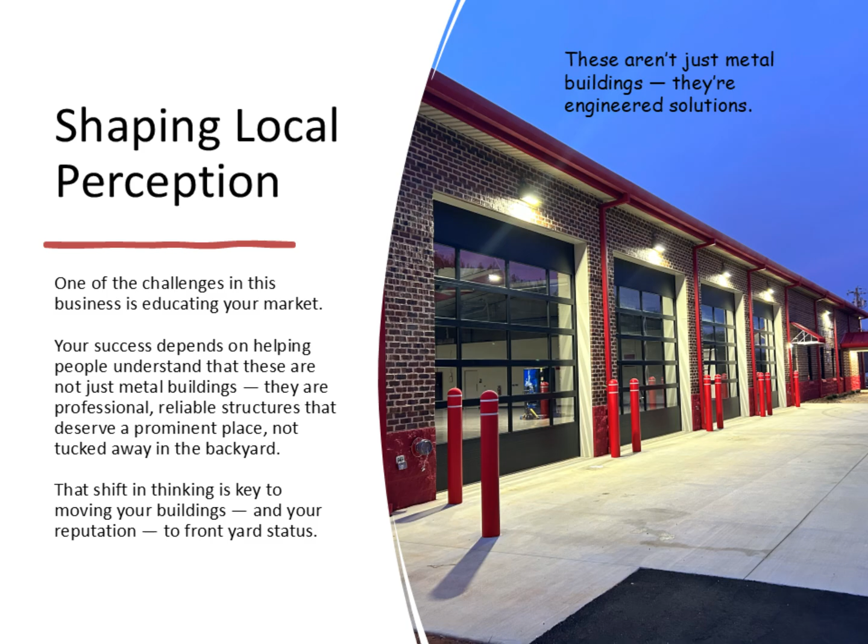A big part of your job is educating the market. People need to understand, these aren't just metal buildings. They're engineered solutions. They're reliable, cost-effective, and look great, too. When you change that perception, you move your projects from the backyard to front yard status.

There's a common belief out there that industrial or commercial buildings must have huge concrete walls to hold up the roof or to keep out the heat and cold. But that's just not true anymore. With CBC's engineered framing and panel systems, we can meet those needs and do it with style, speed, and cost savings.

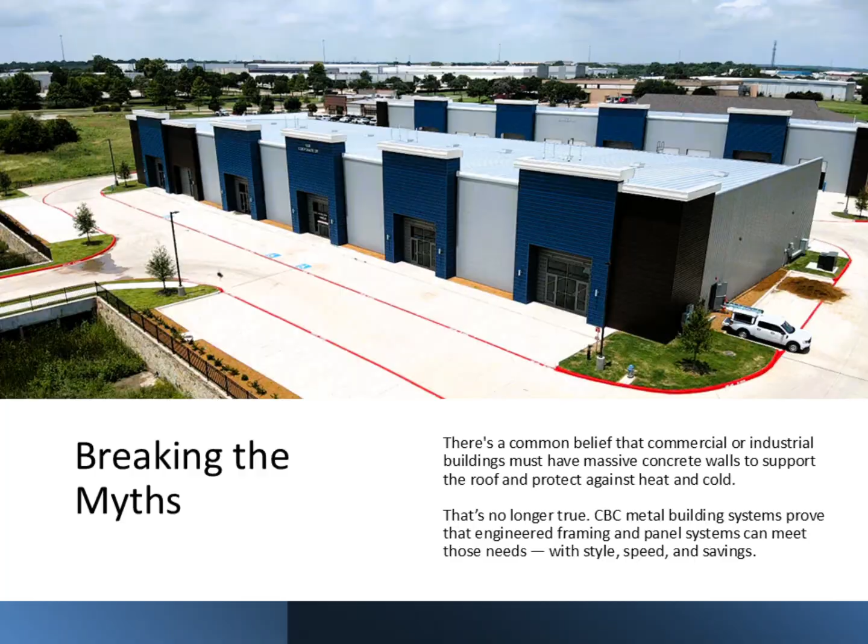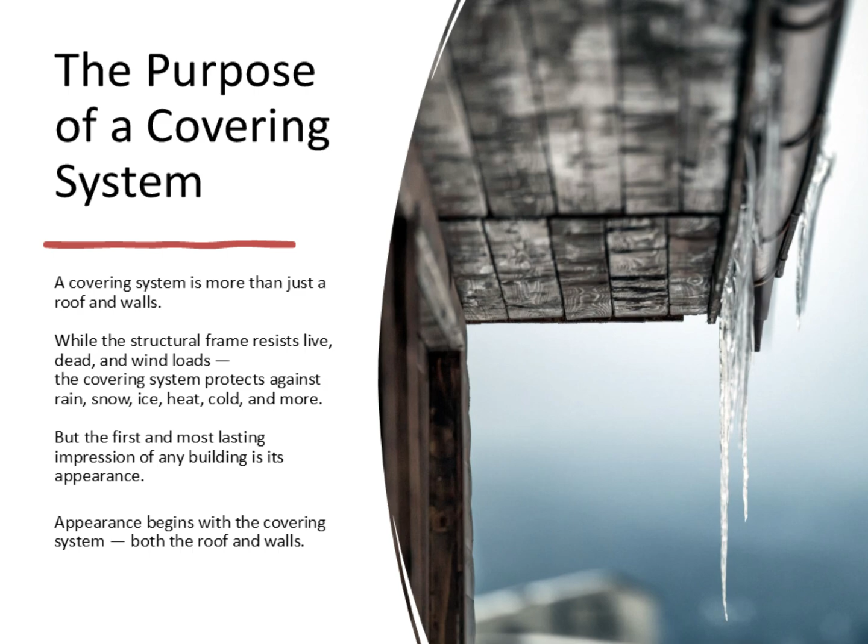A covering system is more than just a roof and walls. While the structural frame resists live loads, dead loads, and wind loads, the covering system protects the building and its contents from rain, snow, heat, ice, and cold. But here's the thing: the first and most lasting impression of a building usually comes from how it looks. And that means the covering system matters a lot, both functionally and visually.

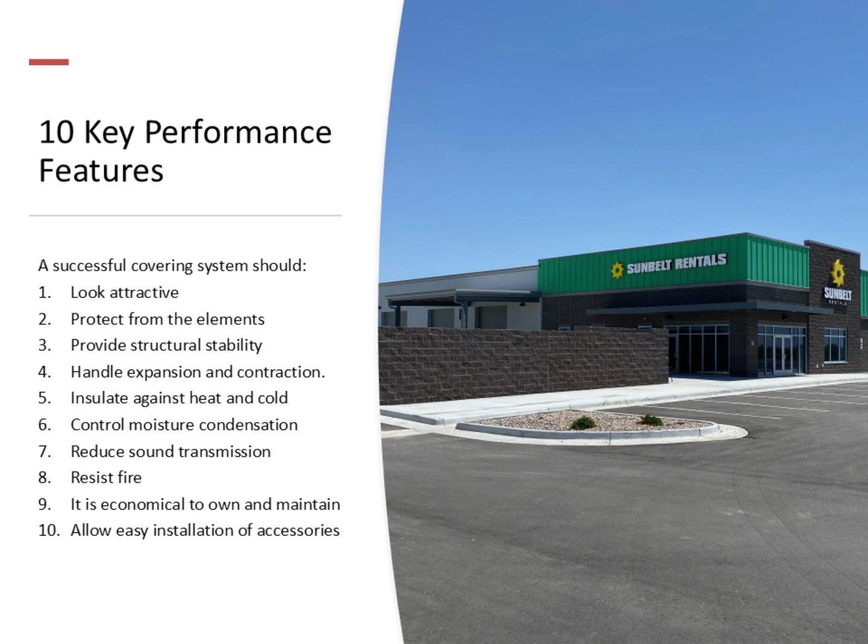Let's break down what makes a covering system truly perform. A great system should be attractive in appearance, protect from the elements, provide structural stability, handle expansion and contraction, insulate against heat and cold, control moisture and condensation, reduce sound transmission, resist fire, be economical to own and maintain, and allow for easy installation of accessories. Each of these can benefit the building owner in different ways.

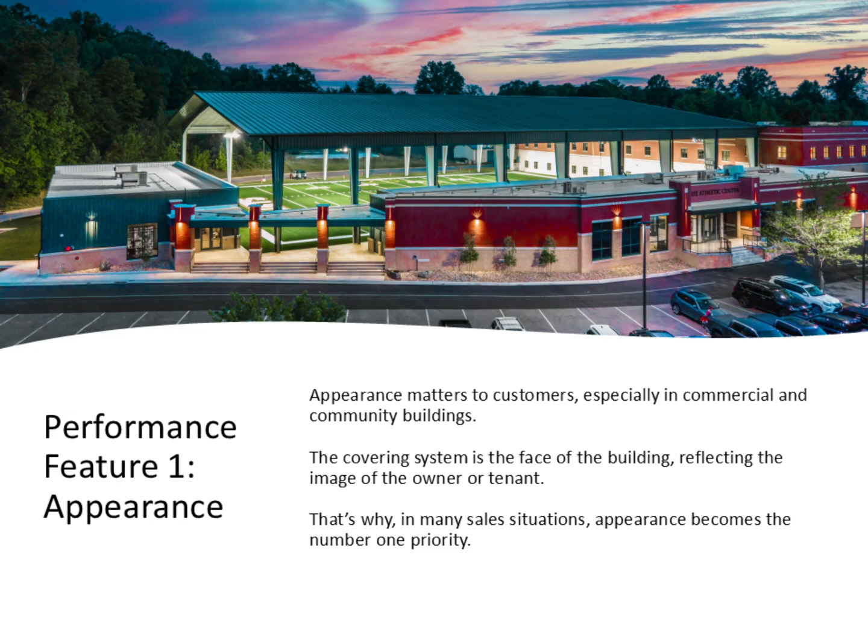Let's start with appearance. Most customers place high value on how their building looks, especially in commercial or community spaces. The covering system, whether wall or roof, is the face of the building. It's the first thing people see, and it reflects the image of whoever owns or occupies the space. That's why, in many selling situations, appearance is the customer's top concern.

Water is one of the most common causes of maintenance problems in buildings. It can come as snow, ice, or wind-driven rain, and it only takes a tiny opening to cause big issues. That's why the panels, fasteners, sealants, and flashing must all work together as one system to prevent leaks, avoid rot and corrosion, and protect the building from the inside out.

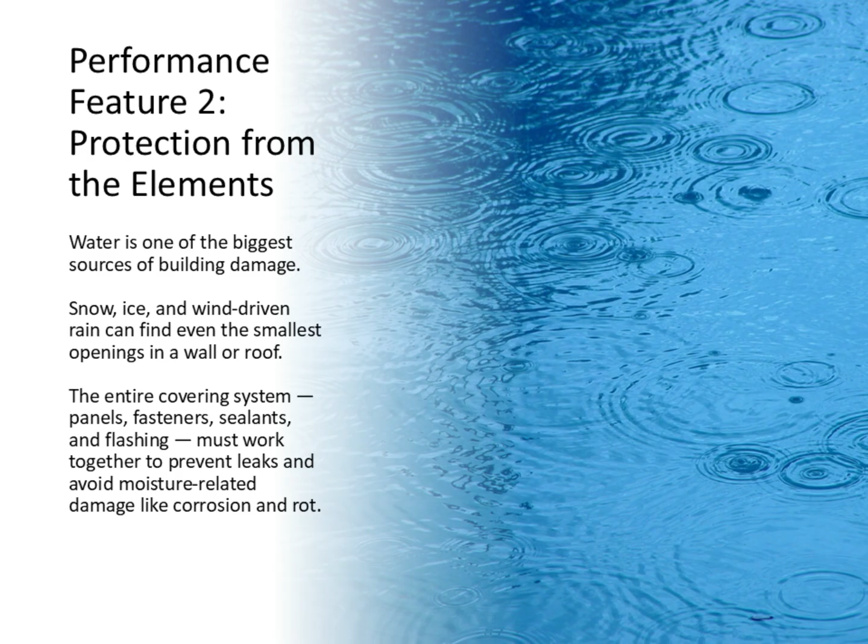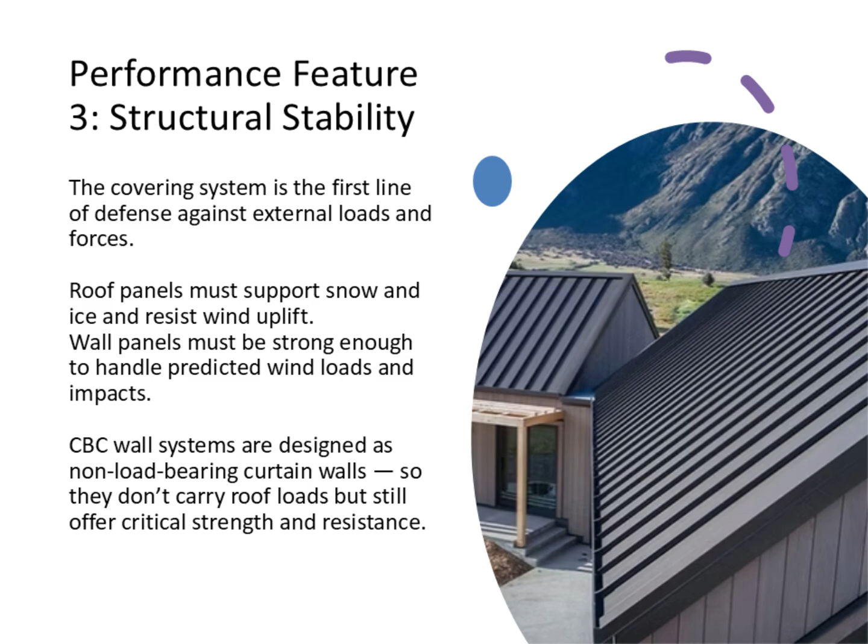The covering system is also the first line of defense against outside forces. Roof panels must be strong enough to support their own weight, plus live loads like snow and ice. They also need to resist wind uplift. Wall panels, while not load-bearing, still need to stand up to wind pressure and daily abuse. CBC wall systems are designed as curtain walls, which means they don't support the roof, but they're still critical for structural strength.

Temperature changes can have a big impact on metal panels. In many areas, surfaces can swing from 10 degrees below zero to over 140 degrees above. A good covering system is designed to handle that kind of movement, with joints and panel shapes that absorb the stress, without bending, breaking, or distorting.

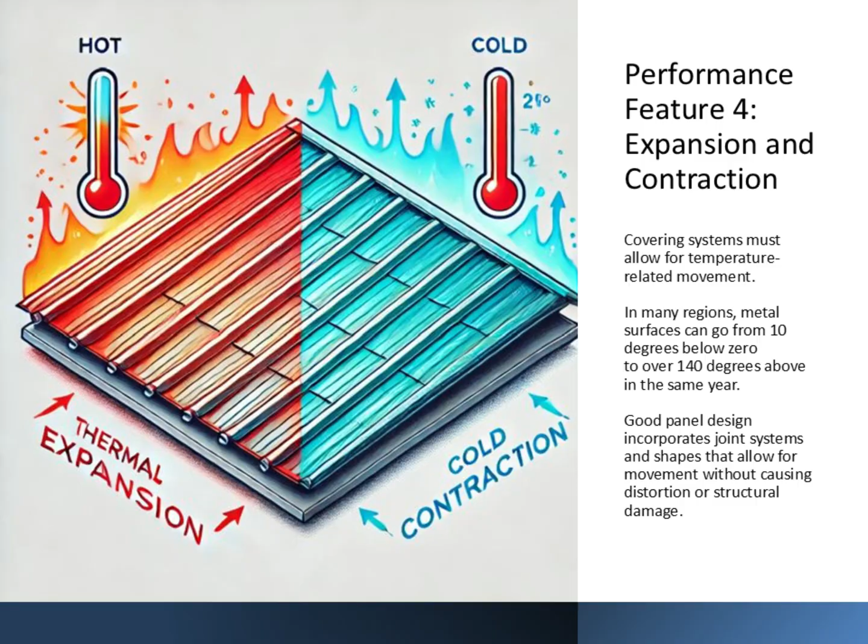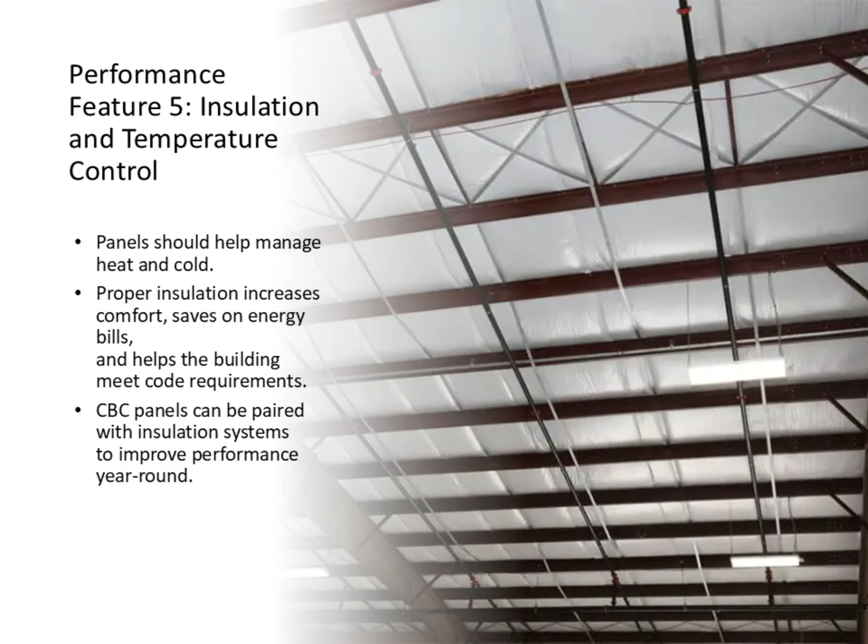Insulation plays a big role in comfort, efficiency, and building performance. Good insulation helps control indoor temperature, reduce heating and cooling costs, and improve overall energy performance. CBC panels are designed to work with modern insulation systems so the building stays comfortable and code compliant all year long.

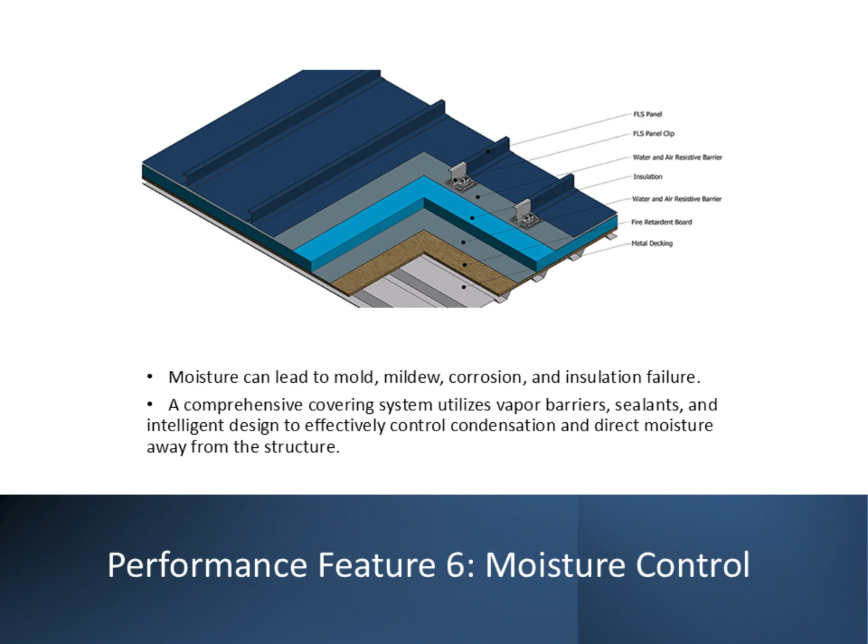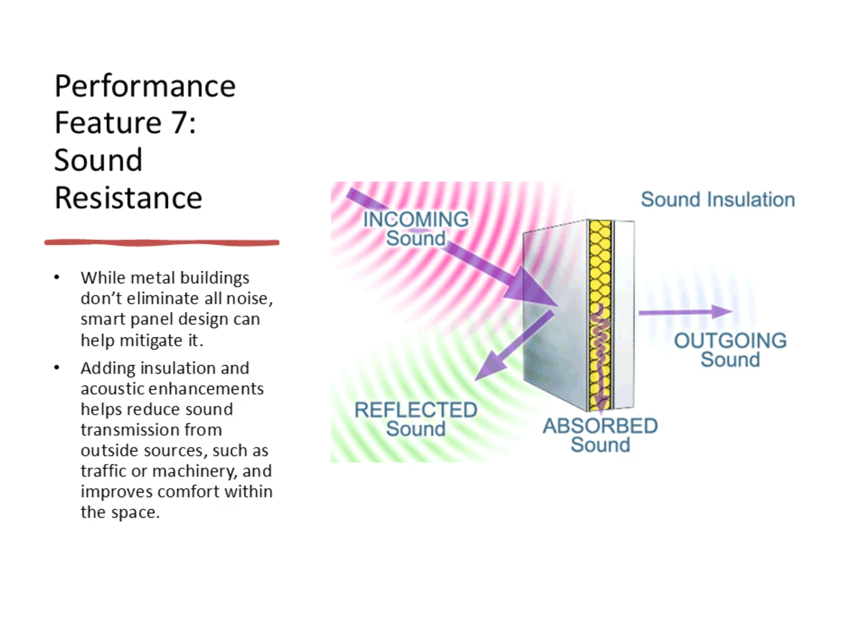Moisture is a hidden threat in any building. If not controlled, it can lead to mold, mildew, rust, and ruined insulation. That's why a good covering system uses vapor barriers, quality sealants, and proper design to reduce condensation and move moisture away from the structure. Metal panels alone don't block sound, but when combined with the right insulation and acoustic design, they can help reduce noise from outside. That means less distraction from traffic, machinery, or weather, and a more comfortable interior space.

Fire safety is a serious concern for any structure. Metal panels are naturally fire-resistant. They don't burn, and they don't contribute to flame spread. When paired with fire-rated insulation and sealed properly around openings, CBC systems help meet strict fire codes and improve overall safety.

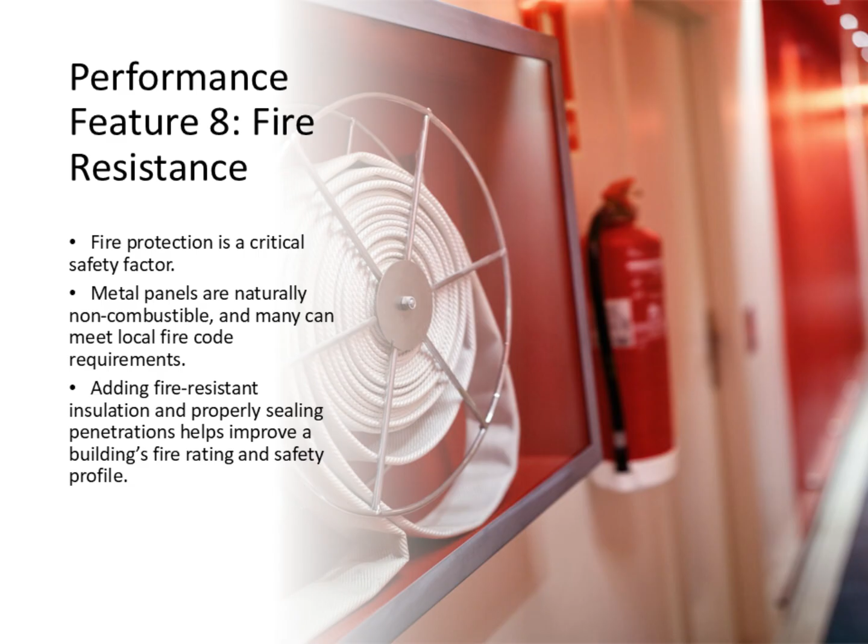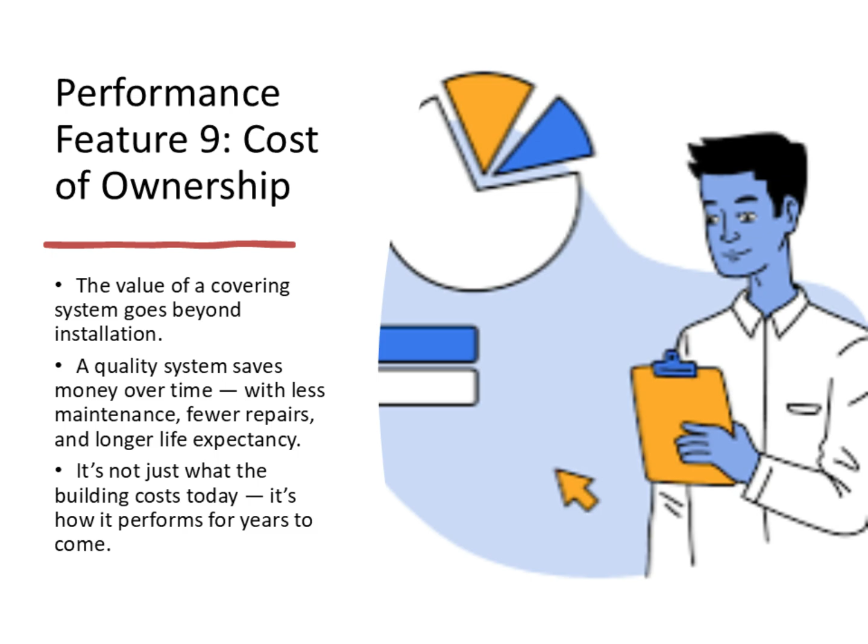Some covering systems look inexpensive up front, but cost more over time. A CBC system is built to last. That means fewer repairs, less maintenance, and more value over the life of the building. It's not just about the purchase price, it's about what you save in the long run.

Accessories like doors, windows, and vents shouldn't be a hassle. A good covering system makes installation quick and clean. And if the layout needs to change down the road, you want flexibility to adjust without cutting into profits or performance.

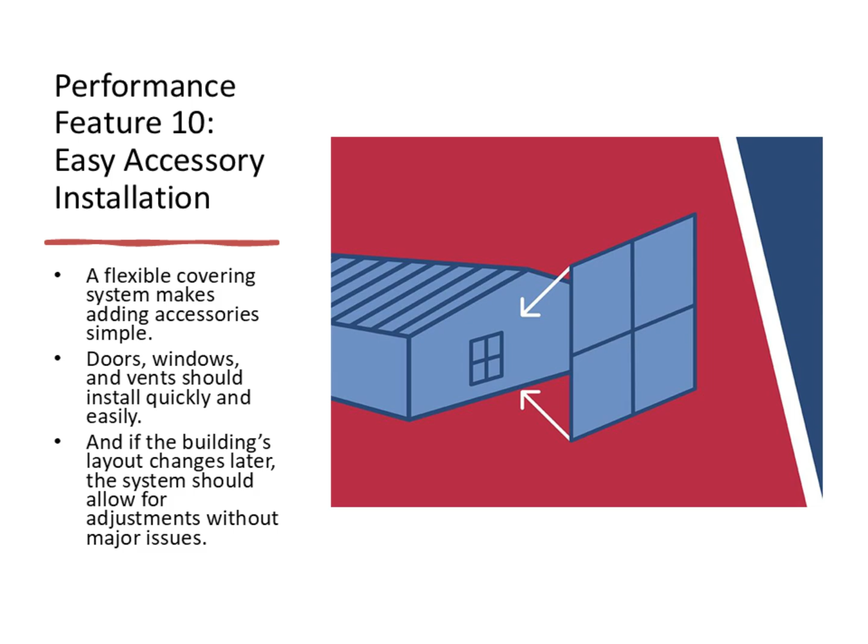CBC panels are built for strength and versatility. Most roof and wall panels are formed from 26 or 24 gauge steel. Standing seam panels are 24 gauge as a minimum. Panel finishes include Galvalume Plus, Signature 200, and Signature 300, giving your customers both durability and design flexibility.

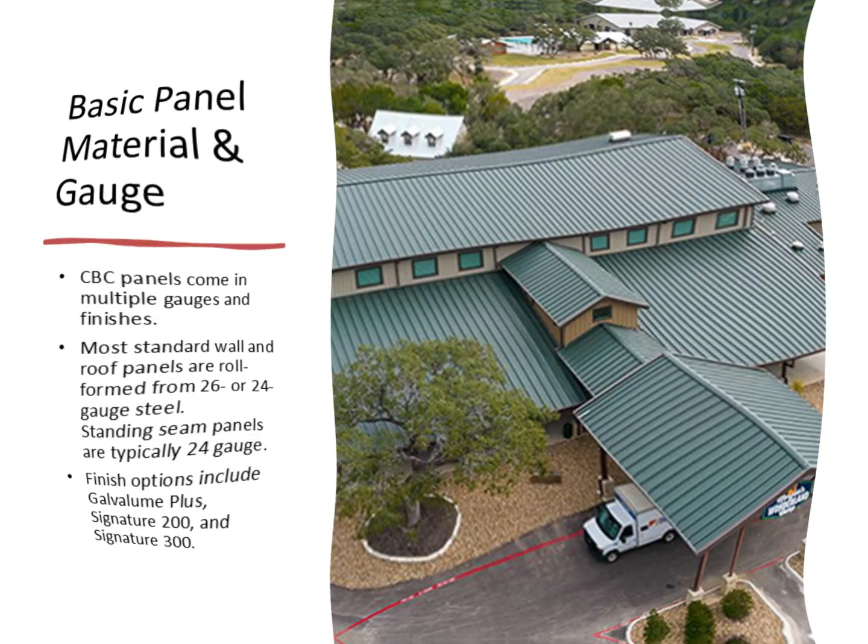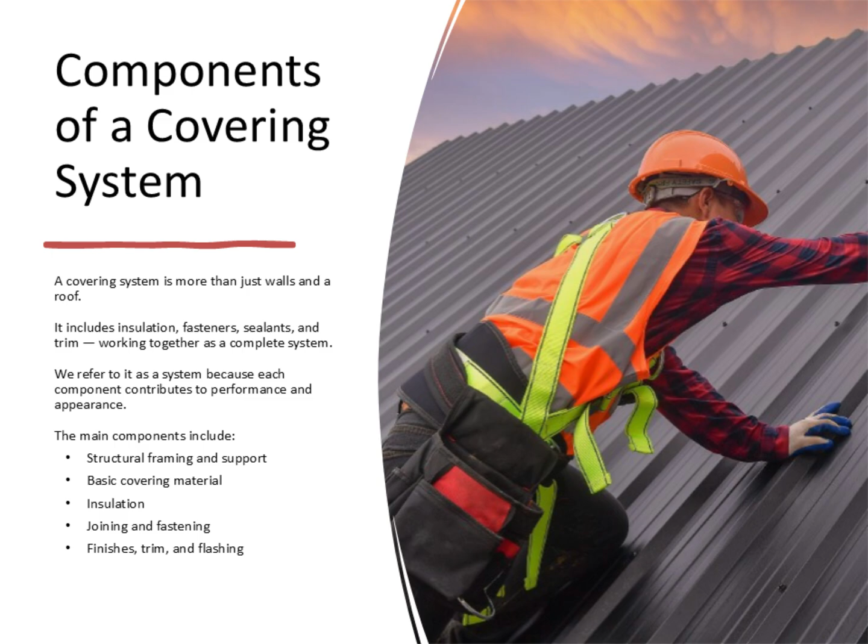Let's take a closer look at the parts that make up a complete covering system. It's easy to think of just the roof or the wall, but those are only part of the picture. Most systems also include insulation, fasteners, sealants, and trim. That's why we refer to it as a system, because all these parts work together. The 5 main components are structural framing and support, basic covering material, insulation, joining and fastening, and finishes, trim and flashing. Let's take a look at each one.

A covering system gets its strength from 2 places: the structural frame and the covering material itself. CBC roofs are supported by purlins and eave struts. Walls may hang from the frame, rest on the foundation, or do both, connecting to base angles, girts, and rake angles. Panel strength also comes from configuration, the profile or shape of the panel. CBC's most common panels include the PBR, PBU, AVP, RR, and RU styles.

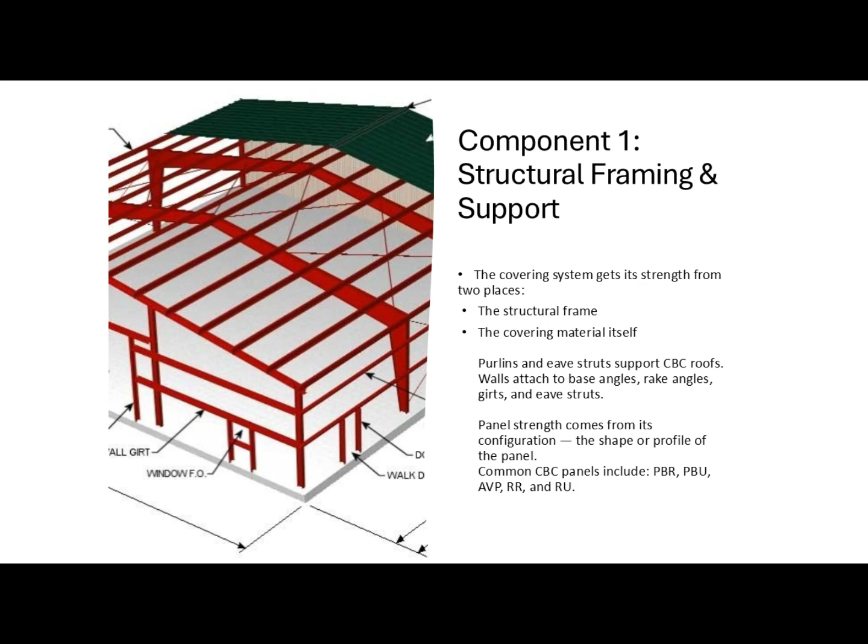CBC panels begin as high-quality steel coil stock, which goes through a detailed cleaning and coating process. Signature 200 and Signature 300 finishes are roller-applied, baked, and bonded, giving great durability and long-lasting appearance. A 30-year finish warranty covers issues like fading, chalking, or peeling. Translucent panels are also available. They can reduce the need for artificial lighting and add architectural appeal to the building.

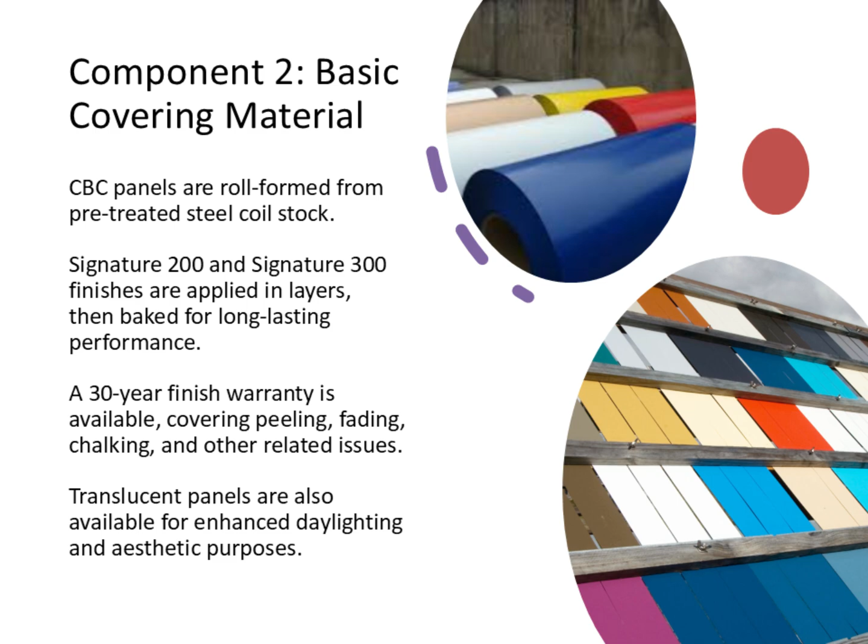Insulation helps control the flow of heat. Good insulators are light and fluffy, like fiberglass or foam, and work by trapping still air. CBC insulation comes in 3-inch, 4-inch, or 6-inch thicknesses with a white vinyl backing. CBC also offers translucent wall panels that act like skylights, called sky belts, which let in natural light and lower lighting costs.

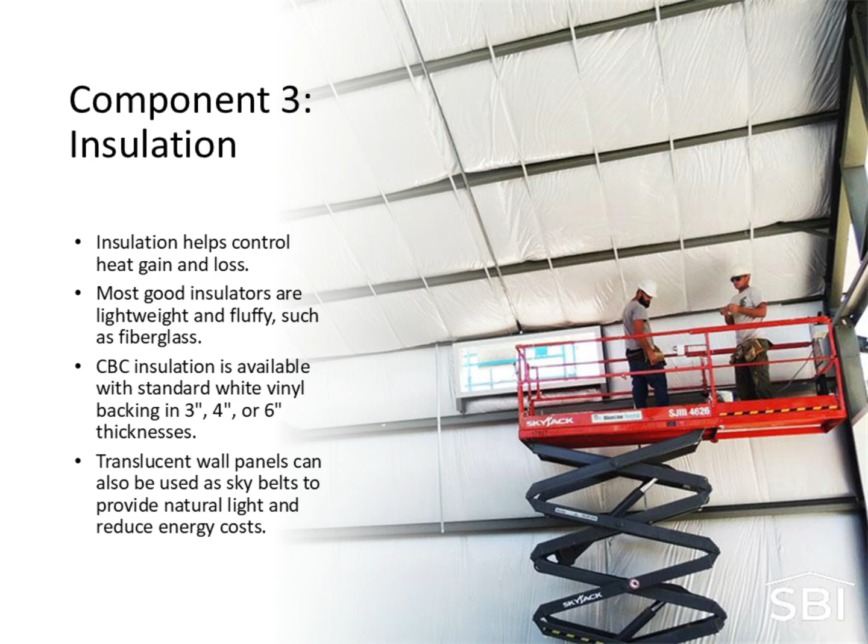All parts of the covering system need to be joined and fastened properly. That means using side and end laps, sealed with tape, foam, or mastic sealants. CBC uses self-drilling screws for most applications and electric seamers to secure standing seam roofs. The fewer joints there are, the fewer chances for leaks or failure.

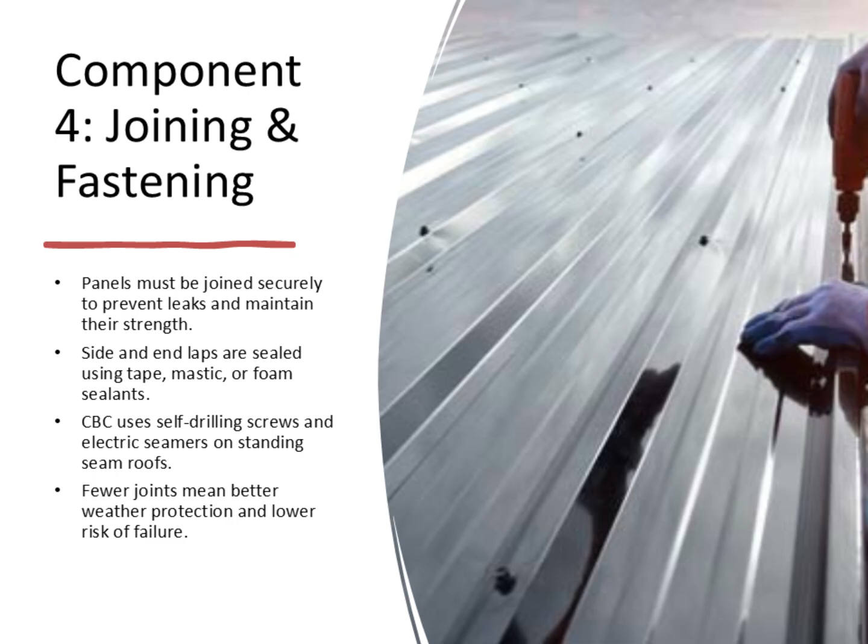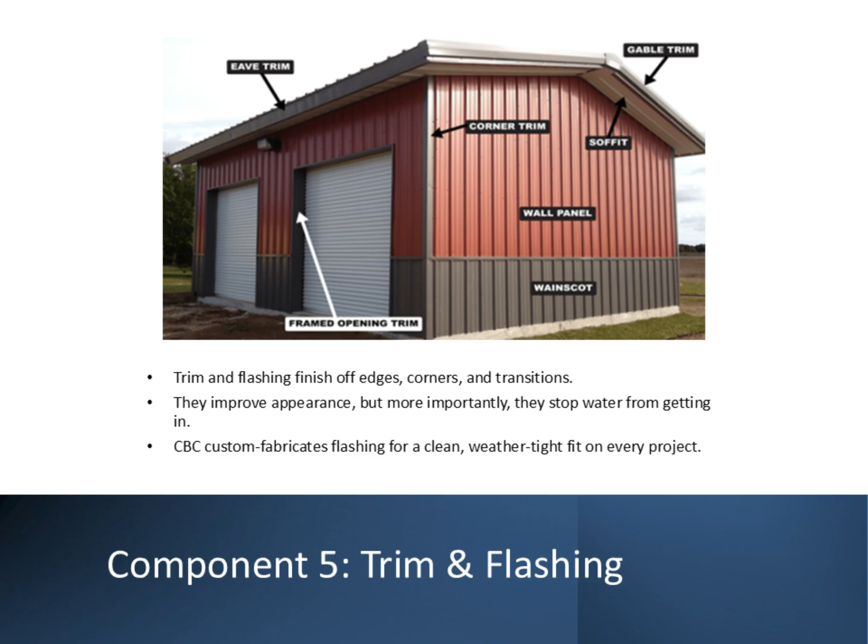Trim and flashing finish the job. They seal corners, roof-to-wall transitions, and panel ends, keeping water out and improving the overall look. CBC custom fabricates trim and flashing for a clean, tight, and professional appearance.

In this module, we covered a lot of ground. We talked about what a covering system is and why it's critical to both performance and appearance. We went through 10 key features that impact quality and the 5 main components that make it all work together. With this understanding, you're better prepared to help customers make informed choices about their metal building solutions.

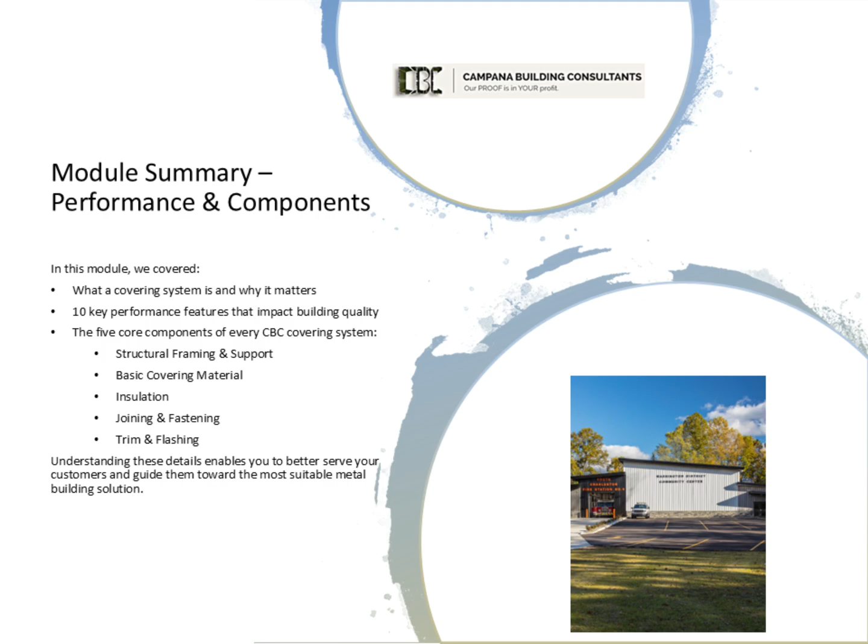Nice work. Let's see what you remember with a quick review. Now let's take a moment to review what we've learned. This short quiz will help you check your understanding and reinforce the key takeaways from Module 3, covering systems. Let's get started.

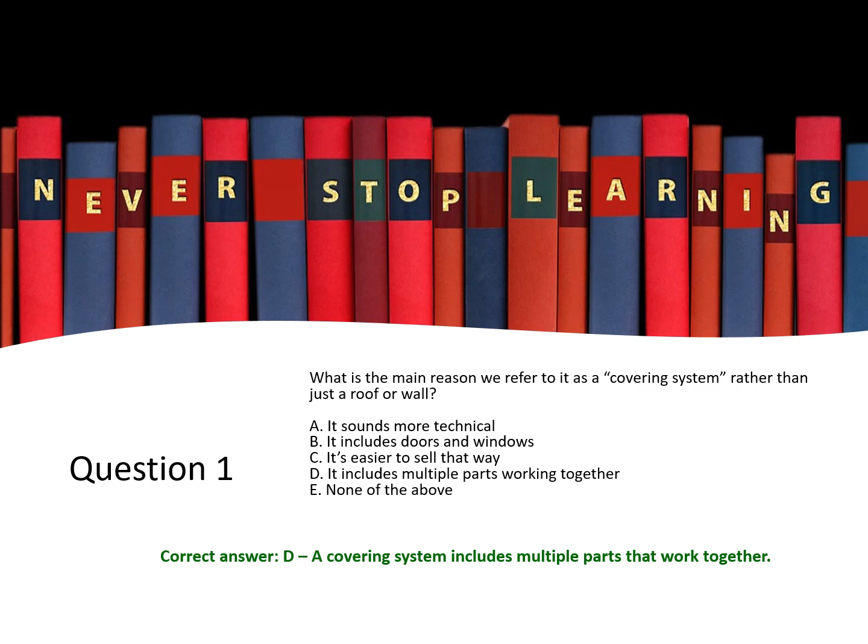Question 1. What is the main reason we refer to it as a covering system instead of just a roof or a wall? A. It sounds more technical. B. It includes doors and windows. C. It's easier to sell that way. D. It includes multiple parts working together. E. None of the above. The correct answer is D. A covering system includes multiple components that work together, such as panels, fasteners, insulation, and flashing.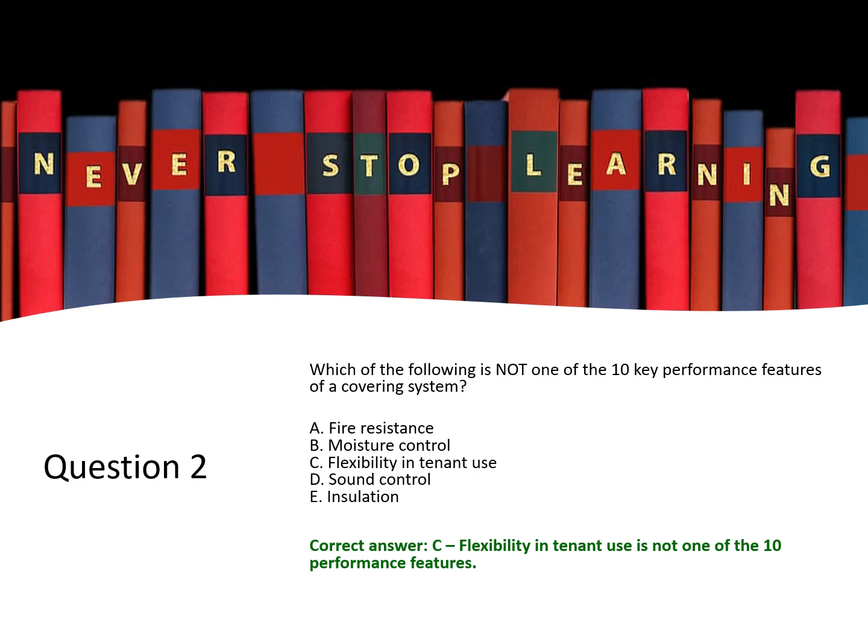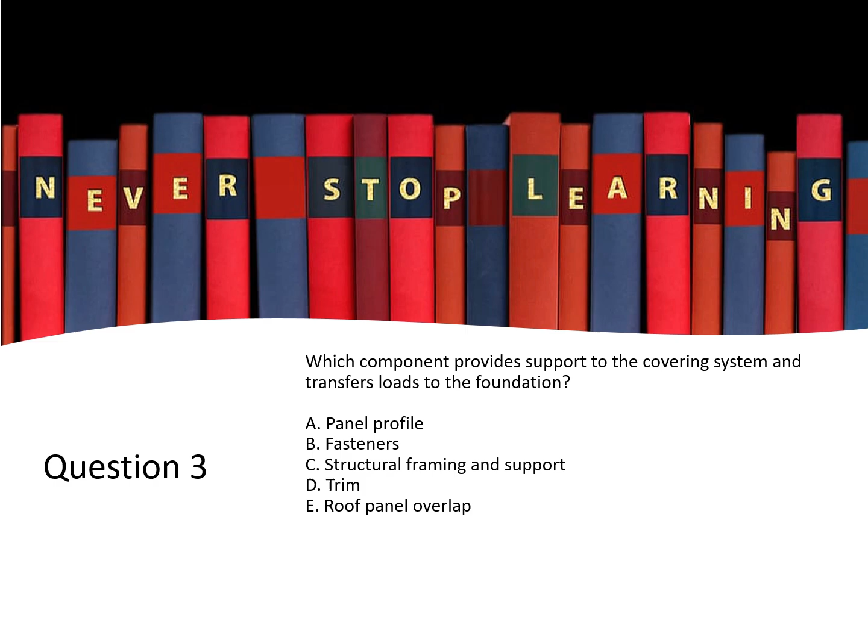Question 3. Which component provides support to the covering system and transfers loads down to the foundation? A. Panel profile. B. Fasteners. C. Structural framing and support. D. Trim. E. Roof panel overlap. The correct answer is C. Structural framing supports the roof and walls and transfers load to the base.

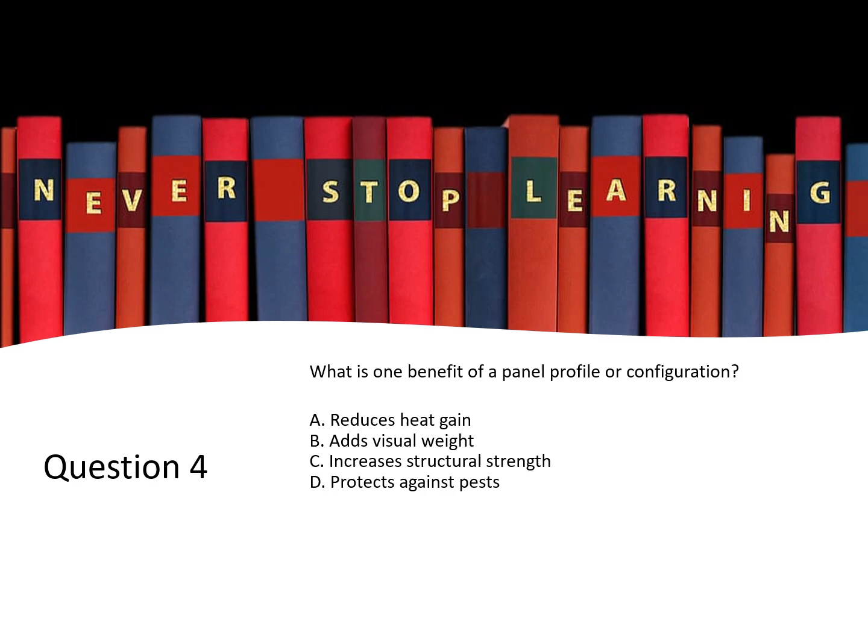Question 4. What is one benefit of panel profile, also known as configuration? A. Reduces heat gain. B. Adds visual weight. C. Increases structural strength. D. Protects against pests. The correct answer is C. The profile increases strength and improves performance.

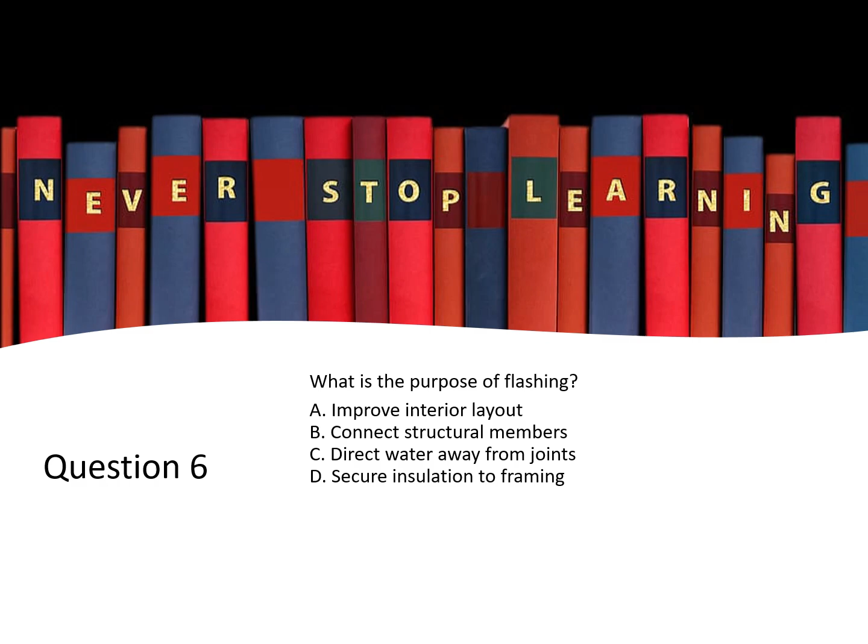What is the main purpose of flashing in a covering system? A. Improve interior layout. B. Connect structural members. C. Direct water away from joints. D. Secure insulation to framing. The correct answer is C. Flashing helps guide water away from joints and prevents leaks.